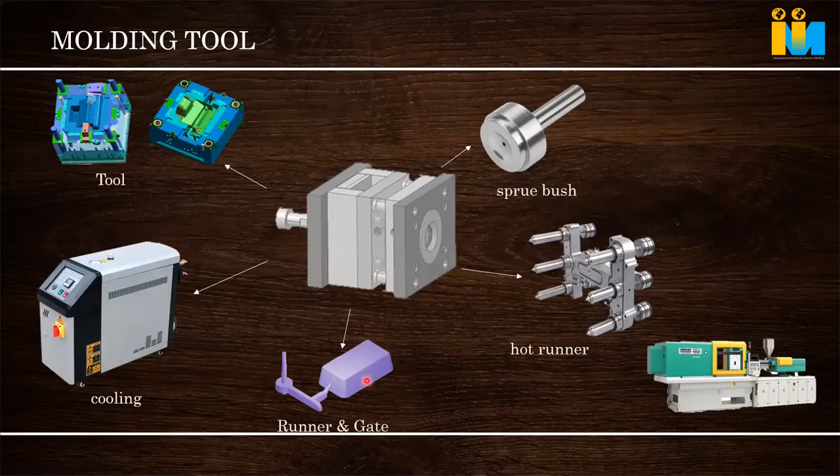These are the types of mold everybody might be knowing. These are standard molds, like two plate mold we used to call this. This is a standard mold, we used to call it two plate mold, and there are slider, side action molds also. Then these are lifter type molds where a lot of undercuts are there. And this is unscrewing mold, like caps, closures and all.

Where our thread comes, you do unscrewing, that gear system, everything will be there. For FMCG caps, closures, bottle caps and all, it is majorly done this way. And this mold type is like stripper plate.

When there is a bigger part, we cannot give a small ejector pin, because when we give an ejector pin, the part gets pierced off in that area, or a hole will happen. So uniform ejection is a technique known as stripper plate. Your part's maximum area will be covered by the ejector plate, and it will be pushed by the stripper plate.

And the last one is a three plate mold. Three plate mold means runner will be coming from one side and the part will be coming from another side. With these molds, three plate mold is not recommended for critical parts, because in a three plate mold the runner length will be so huge, there will be so much pressure drop.

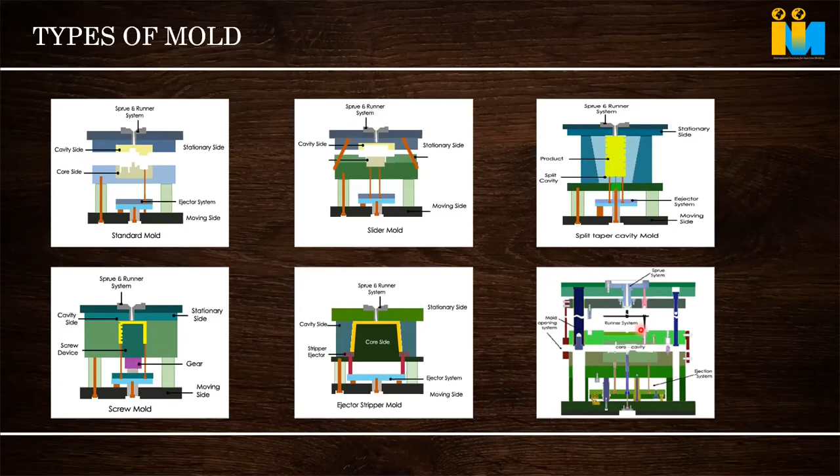And the gate also, we have to give a very conservative gate on the part. There could be problems. We will be compromising something. Whenever a critical part comes, instead of going for a three plate mold, better go for a hot runner mold.

Now is a very very important thing, runner and feed system. This will go a little deep. So runner, as everybody knows, is a channel machined in the mold which connects the sprue from the machine nozzle. Sprue will come, runner will come, then the gate will come.

Everybody asks what should be the size of the runner. Straight away they will increase the size of the runner. But runner has an optimum size. If the runner size is too big, what happens?

It is a wastage, because our part might have cooled in 10 seconds, but just to cool the runner and open the mold, we'll keep another 10 seconds extra. It's a money waste, our cycle time wastage. So an oversized runner will increase the cycle time and it's a wastage of money.

And if the runner is too thin, what happens? Huge pressure drop. Whatever pressure you are giving in the machine, nothing will go to the part. So your part will not have consistency or proper filling. Then what happens? We'll give all the pressure in the machine to fill, that means again our power is going to loss.

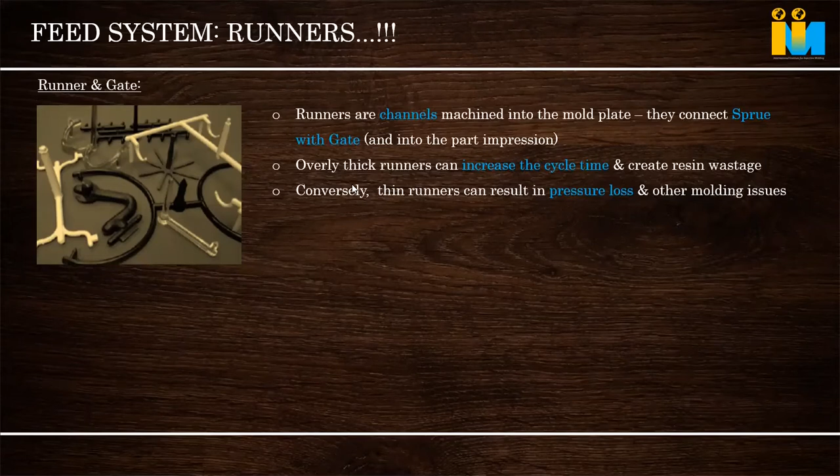So for runners, there should be an optimum size of the runner, based on the pressure drop, as I discussed. Based on the pressure drop, we can decide the runner size. Optimum runner design helps ease of filling.

And we have to see what is the weight of the runner also. If we are not able to grind and reuse the thin runner, then there's no meaning in increasing size. But at the same time, we have to see what pressure drop is happening also. Some people keep a small runner, saying weight of the runner should be less, but they never see what pressure drop is happening, as we discussed earlier. So we have to see pressure drop to arrive at the size of the runner also, to make it optimum.

Then runner, there are multiple types of runner cross sections: round, semi-round, trapezoidal are there. Which is the best, we'll be discussing.

And runner polishing, we have seen in automotive industry mainly, they never polish the runner. They will polish their part nicely, but leave the runner as it is. No, that is not the correct thing, because the material from the runner only goes to the part. So for proper flow to happen, we have to polish the runner feed system also.

So runner thickness depends on the part volume, weight of the part, flow length, everything. If the runner is too small, it will not help, because of pressure drop the material freezes away.

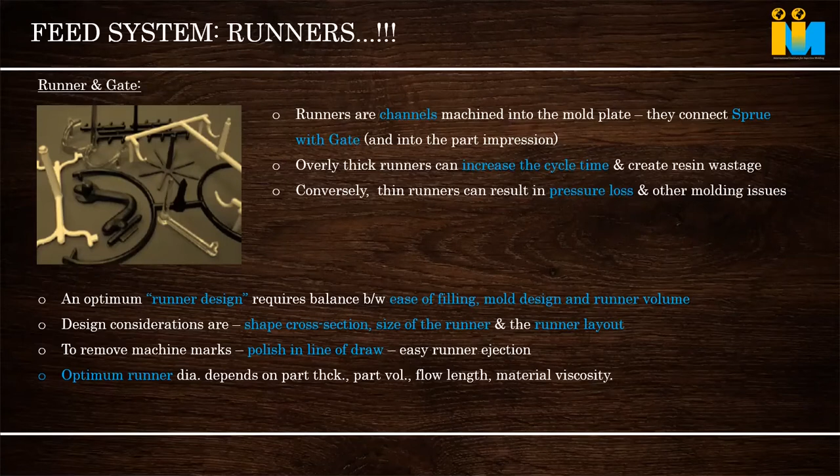So we may have to give a bigger size. These are the types of runners. First is known as trapezoidal runner. Second one is modified trapezoidal, where we put a circle and join with an angle. Third one is round. Round happens as a mistake due to machining. Next is half round runner. And there is an odd shape, trapezoidal but odd shape.

So among these, which runner is the best? You can see round is the best, and round trapezoidal is the better.

So what is the efficiency of a runner? How do we understand the efficiency? Efficiency of the runner is derived by the area of the runner divided by the circumference or periphery of the runner. If we calculate that, we get the proper efficiency. So area of the circle divided by pi r square by pi d gives the efficiency of the runner. If we calculate for every runner, we come to the conclusion that round runner with a small cross section gives the best efficiency. That's why round is the best runner, we used to say.

If you practically inscribe a circle inside the runner, flow in the runner always happens in the center portion. Whenever plastic comes and hits the side area of the runner, wherever steel is there, that area freezes. Only the center area flows, raw material flows through the center. So whatever shape you keep, only the center round portion will flow. It is best to keep the proper size based on inscribing a circle inside the runner, because only the center area will flow. Whatever else you keep, all those sides are wastage.

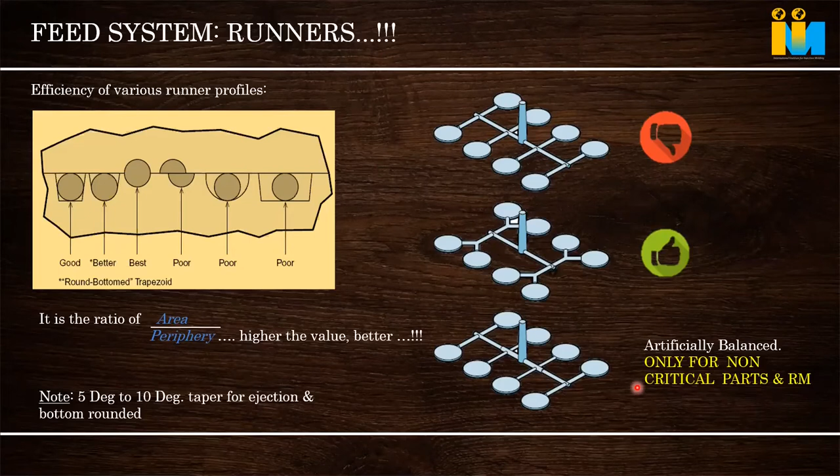What happens after the mold runs for a certain period? Some runners get smaller. If all the runners are the same dimension, it uniformly expands and no shape change happens. But if you are adjusting everywhere, some runner increases based on the pressure difference due to the size. What happens then is that cavity overfills or underfills. So we will not be able to control it properly.

So this is a nozzle, everybody knows this. In the machine, this is the sprue bush. The entry of the sprue bush for engineering plastics should not be too small. We see machine suppliers give like 2 mm, 2.5 mm, minute sizes. It is our duty to increase it to 3, 3.5, or 4 mm based on the raw material. For tougher material you have to go higher, because if you inject tougher material through a small hole, it gets damaged — the molecules get damaged.

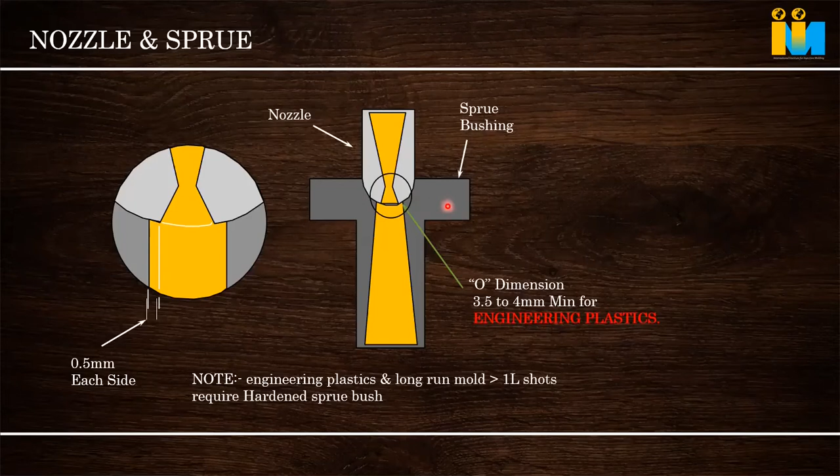So we should take care of that. Machine people give a standard nozzle, but it is based on our raw material that we have to adjust it. The sprue bush diameter and nozzle — normally, the sprue bush should be 0.5 mm higher than the nozzle, so that no mismatch happens. This is the normal thing. And this is a sprue puller.

So the function of the sprue puller is to pull the sprue from the cavity side and bring it to the moving side, and while ejection it is pushed out. So this sprue puller is not just to pull the sprue. There is one more very important function. So based on that, we have to design it.

Sprue puller is the first point where the cold material from the machine tip will be. That cold material first comes and stays somewhere. It should not go to the part, inside the runner and the part. So this sprue puller is a cold slug well also. It will trap the cold material. That's why it is known as a cold slug well.

I know some mark will be there in the part. Sometimes the gate will freeze off. In the running, in between, if the cold slug or sprue puller is not proper, some cavity will freeze, some cavity will not come suddenly, and that cold material will go. For that, a better sprue puller design is needed.

And second, Z puller, people are using. This is not recommended for automatic type of mold, automatic running mold, because you have to remove it with the hand every time. It will not fall down. If it doesn't fall down and you are running it automatic, then damage can happen to the mold.

And third, like some people, instead of making a reverse taper, they put a groove. What happens is when the sprue or runner ejects, that groove will sit inside the mold itself. Next time it will not pull. So that is not easy to manufacture, and not so effective.

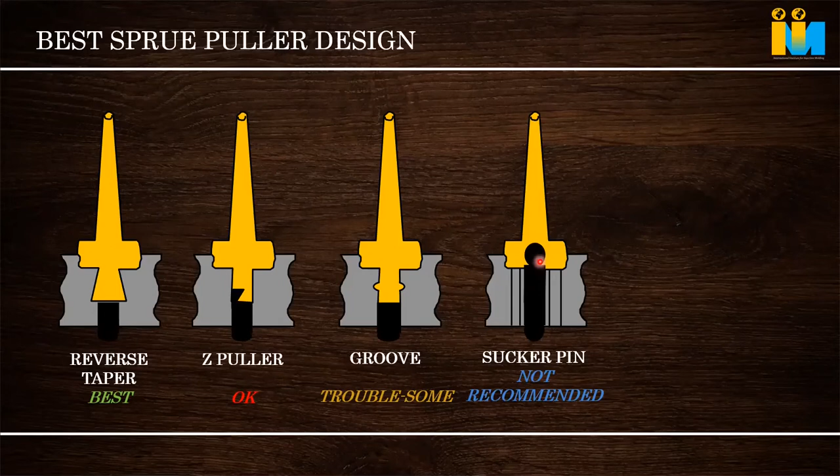And this is a type of sprue puller used in 3-plate mold and all. This is not recommended because this obstructs the flow of raw material. The raw material flow is obstructed by this puller, so pressure drop happens, filling problem happens. So this is not a recommended one.

Then what should be the size of the cold slug well? I told you, it's not cold slug - wherever there is a dead spot happening, metal is changing its direction, there should be a cold slug well. It is not a cold slug, it helps to trap the cold metal, the front metal that is coming.

So normally it is 1 to 1.5 times the diameter of the runner. That is the dimension. Wherever the end is there, you give a 1 to 1.5, that's why the runner is little bit extended. If not given, then you'll have a quality issue in the molded part.

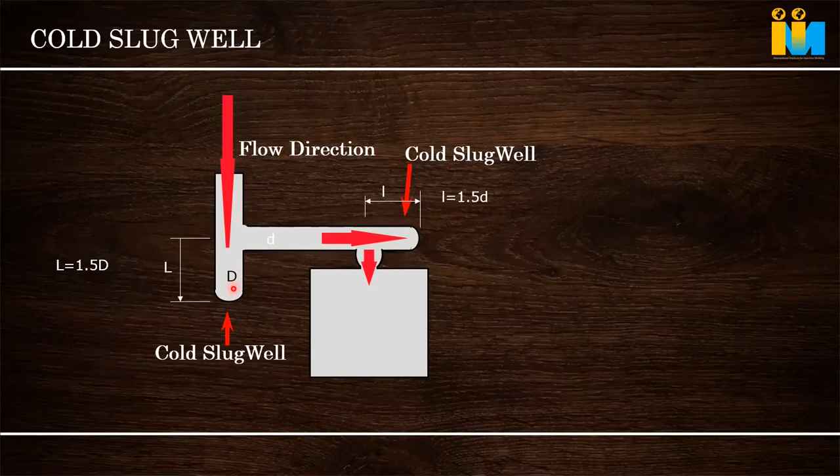These are the major types of gates everybody might have seen. First is the direct gate, second edge gate, fan gate, tab gate, overlap gate which is given above the part, some diaphragm or disc gate for round parts with uniform filling. And second is submersible gate, like pinpoint gate or submersible gate, banana gate, all these things. These are the second type of gate, known as automatic degating. Here the part will come separate or the runner will be separate. In the first type, we have to do a secondary operation.

So ideally, broadly we can classify this into two types: one is the edge gate, second is the submersible gate. All other varieties are a form of edge gate only. Whatever we are seeing on the left side, all are some form of edge gate because everything is attached to the part - direct, edge, fan, all these, based on the filling. Gate mark is coming, so we'll give a little bit expanded fan gate. So all are forms of edge gate, multiple types of edge gate. Only the shape changes based on our application or some molding issue.

Edge gate size is based on the runner - see how to derive the size of the gate, we'll be speaking later on. So people say it is based on experience. No, it is not just based on experience. There is a calculation for deriving the gate size.

Then there is a submarine gate or submersible gate. Many people don't prefer to use it. Why? Because they feel the gate mark comes. But how to make a submarine gate? Submarine gates are very fantastic gates. They can give us the same feel as much as an edge gate if we are designing it very properly.

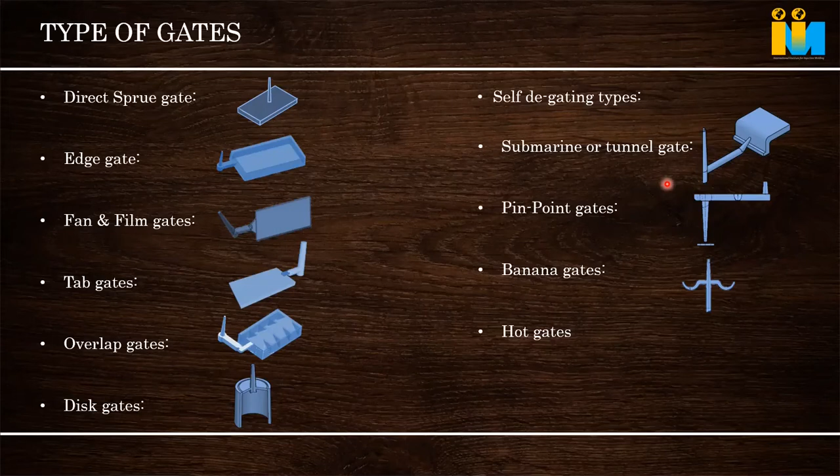If we are not designing properly, it goes for a toss. You'll get a lot of issues - pressure drop, gate freezing, everything. Then people will change it to edge gate. How can we design a submarine gate? We'll go to the next slide.

There are two types of submersible gate. One is a standard construction in which directly this will be machined in a conical shape - this is a normal submersible gate. And second is a high volume or modified tunnel gate, which we used to call modified. So I recommend this second type of gate.

Why? I will describe. Whenever material comes from the sprue bush, runner, into the gate and to the part - till the gate and in the part also - that melt temperature, from 300 degrees at the machine where we are injecting the material, it drops. It comes to 300, 280, 290, 280, 270, 250, 240 - it starts dropping in the flow as it flows through the sprue, runner, and gate.

Our requirement is that when it flows to the part, minimum temperature drop should happen. For getting a better quality part, 300 degrees should remain 300, or very little temperature drop should occur, like 290. Normally a 5 to 10-degree drop only is recommended to get a consistent part.

Because when the temperature drop happens, the total flow behavior of the plastic changes, since plastic changes behavior based on temperature. Higher the temperature, flow is higher. If you go still higher, then burning happens, and then it becomes solid again. Burned material is like carbon - it never flows. Our motto is to keep the temperature from dropping beyond a certain limit.

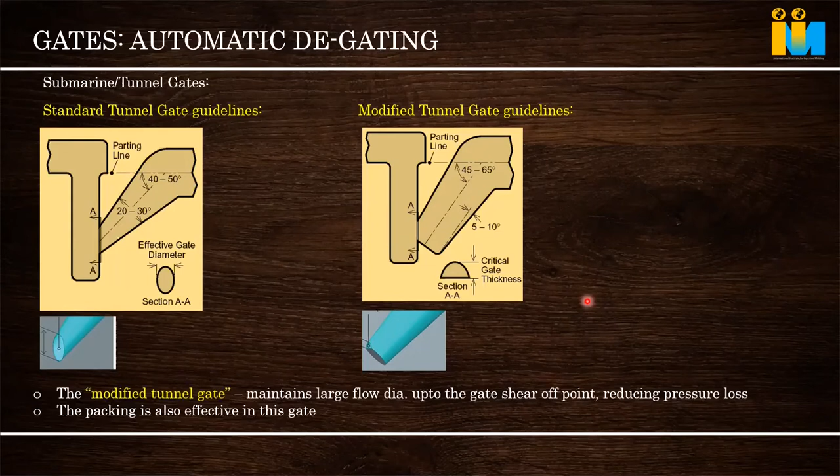What should be the dimension? I am just showing one example - this is one example I normally used to make for parts. It's not just the shape we give, that modified shape. Many people, whenever we tell them to keep that shape, just copy the shape only - no, there should be some volume.

It's 2 to 3 mm here. Then only it will heat and create turbulence. And I also mentioned plastic always flows in the center area of the flow path. Here the volume is higher than the center core area, so a lot of raw material will flow inside the part. This is how this gate is designed.

So here injection time also gets reduced because melt temperature will not drop - you don't have to push again, because whatever temperature drop happens, it regains when it touches the gate area. That's why this gate is recommended. The part fills easily and packs easily. I replaced an edge gate with this gate on a Snyder machine and got savings, since we were working for savings there.

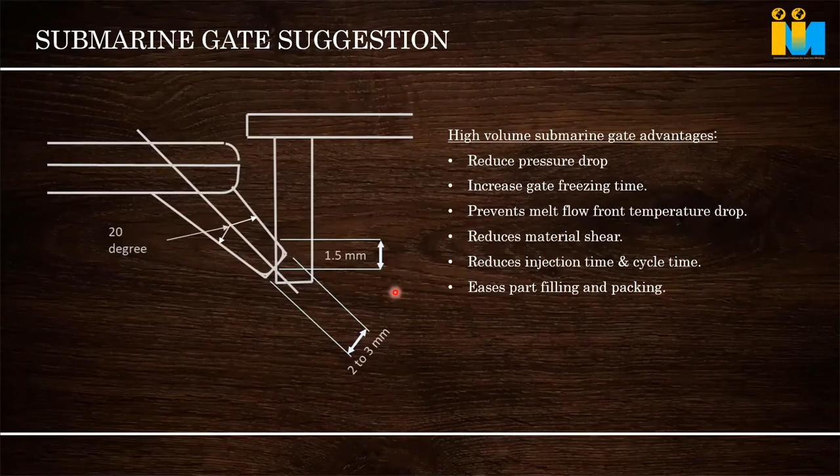How to derive the size of the gate? Gate size is not something you just go with everywhere - everybody says it's based on experience, but no, it's not just experience. There are a few considerations we have discussed regarding pressure drop. Whenever we are making a mold, we have to see what pressure drop occurs. Up to the gate, it is recommended that cold runner pressure drop can be up to 30 to 35 MPa. In a hot runner, it can go up to 50-60 MPa also.

If it is not within range, it means we have to modify the gate size. The gate size is not proper. This is under-designed.

Whenever we are designing a mold, at design time, how do we set the gate size? It has to be done based on the shear rate of the raw material. What is shear rate?

Every raw material has its own shear rate based on its molecular property. The more complicated the raw material, the less shear rate it can take. Shear rate means you are pushing a raw material at high speed inside the mold, and due to the higher temperature, it gets destroyed. If it is destroyed, your part will not get the desired property.

For shear rate, there is a calculator for calculating it based on the gate size and injection time. There is a calculator I will share with you.

If it is polypropylene, a simple commodity plastic, it can take shear rate up to 1 lakh. When we come to ABS, it can take up to 60,000. When we come to polycarbonate, it can take up to 40 to 50,000. When we come to Ultem or something, it can take 30,000.

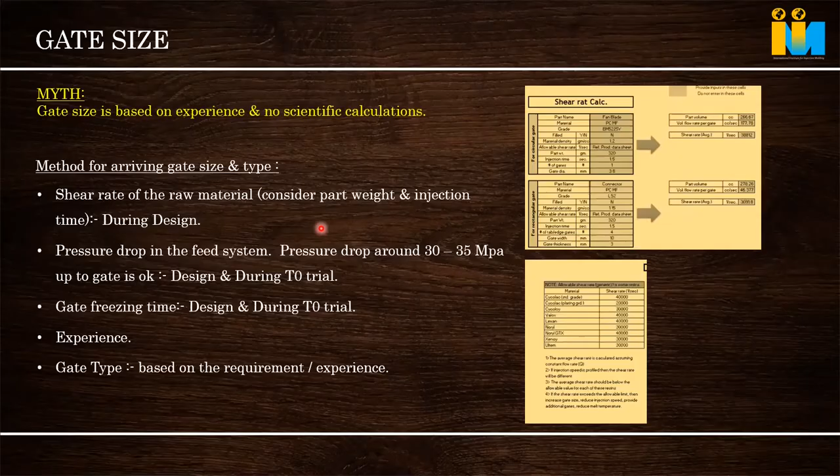So all these things we have to take care of when designing. This is a shear rate calculator.

Hope everyone can see. First I am putting the part name and so on, whatever you want to put. There is also melt density, which will be there in the data sheet. You can put the density. For polycarbonate, it is 1.2, so I put that.

Now I have to put the theoretical weight of the part, which I already know, so we put the weight. And injection time, as I told you, a good injection time will always be lesser. You can put 1 second of injection time, don't put 10 seconds, because that will give a wrong result — 10-second plastic behaves so oddly, because it will become totally cool while you are just pushing and filling, so it will not give the right result. Keep in mind, even the biggest part, like an automotive bumper part, fills below 4 seconds.

If it is not filling, then we have to go for multiple gates. It's not like increasing the injection time will fill the part properly. If it's not filling, instead of one gate, we give multiple gates sometimes in a bigger part, because every gate can only take up to a certain size. You cannot increase the gate size too much to avoid shear. So instead of giving one bigger gate, we split it into 4 gates, and we maintain the shear rate in all gates at the required level.

So my injection time, I kept it at 1 second. Number of gates in the part, I'm keeping 1. This is for a round gate. Gate diameter, I am keeping 1 mm. Material is PC. Now you can see the result is 2,71,000. You see? 2,71,000 is the shear rate coming out. Now we have to go to the chart. This is PC, okay?

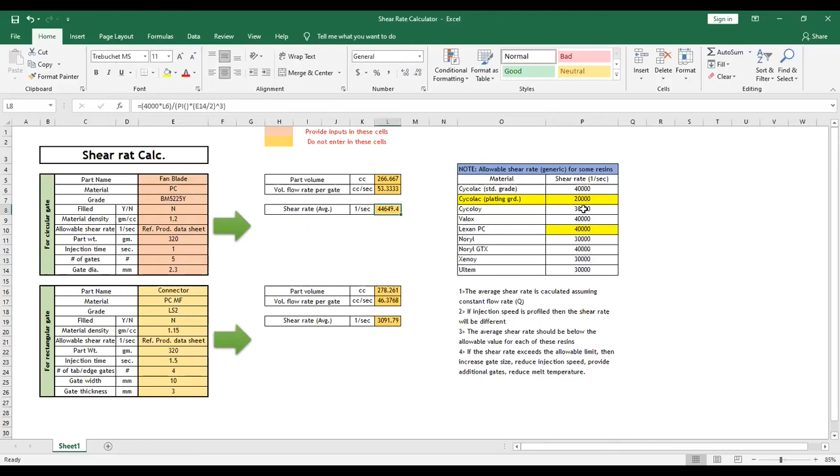Then we have to increase it. If we are not able to increase the gate size, then we have to increase the number of gates in that case to fit it inside this. Here you have to increase the number of gates. This is some of the pattern.

If gate is on a bigger part, suppose we are giving the gate at the center, it's like a scale. Suppose this is a scale. No scale you can see, even the biggest of scales, you cannot see a gate in the center of the part. If you give it at the center, what happens? Flow will happen in both directions. What happens? You will know the part will tend to bend.

If instead we are giving two gates, then what happens? Material will come and hit, and a weld line will happen at the center. So for bigger parts we always give gates on the side. In automotive parts, what we do instead of giving it on the side is multiple point injection, and sequential injection. One gate from the edge will start injecting. When the flow reaches the next gate, automatically the valve opens and injection happens there. So that meeting will not happen, it flows uniformly.

So this is how the gate even gives the shape of the part. And it is not like that for every part - it's an indication I am telling you. Suppose your part with just one gate is bending, or with a center gate it is bending, that means you have to shift the gate.

There are two types of gate. One is an edge gate, one is a submarine gate, or like a pinpoint gate. For which shape is the runner best? When we see, an edge gate will always come at the parting line. So for an edge gate, a round runner is the best. So this is a round runner.

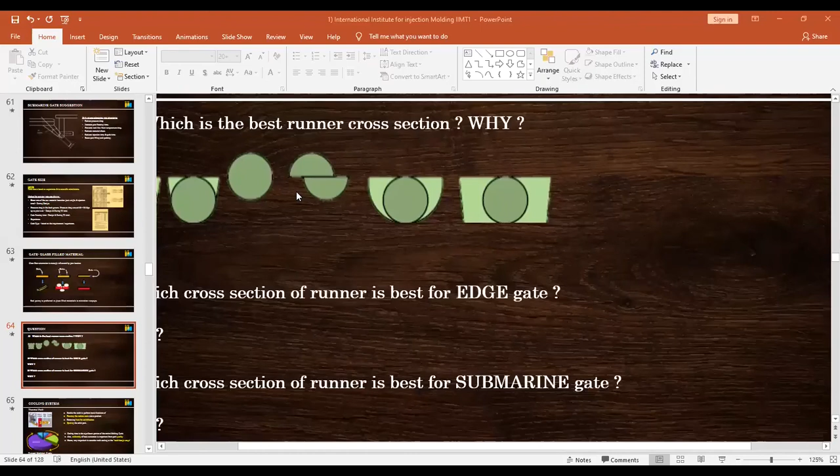This is the parting line of a mold. The edge gate will come here. When we manufacture the edge gate, it is like this. Okay.

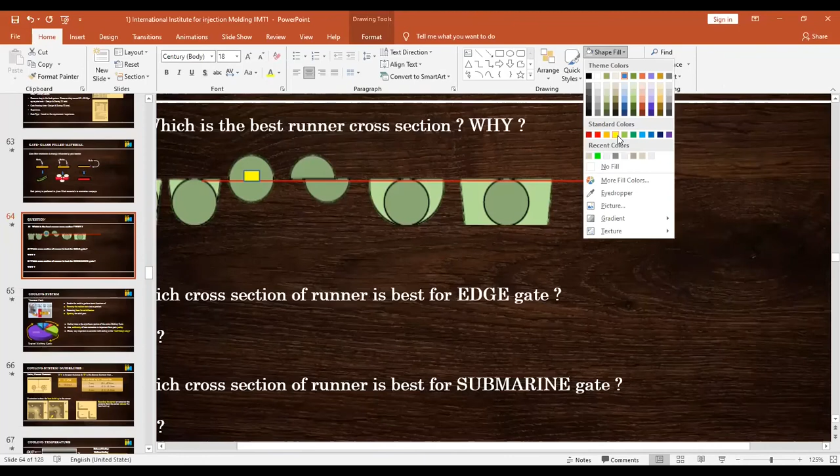So it comes in the center. Plastic material always flows through the center of any profile. So whatever profile it is, if it's a round runner, the center material goes into the edge gate. So it will give a good result.

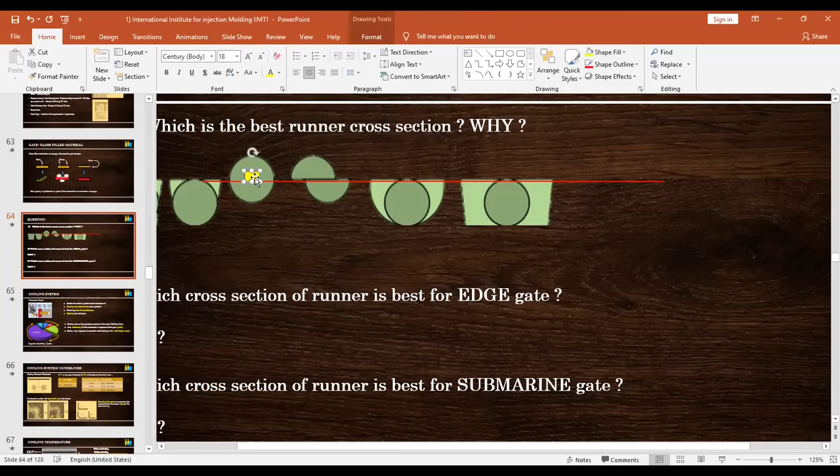Suppose the same edge gate is given in a trapezoidal runner. Then what happens? One side has hot melt, and melt flows in the center of the runner, but one side is steel, so that side cools off. Then the efficiency of the gate will reduce. So for an edge gate, always recommend a round runner.

But for a submarine gate, I'll show you, it looks like this. Submarine gates come in one side, it cannot be on the center, we cannot keep it in the center. So for a submarine gate, this trapezoidal runner and round runner both give the same result.

This is why for an edge gate, it is recommended always to have a round runner, even a small one is good enough. But giving a trapezoidal runner in an edge gate will reduce its gate efficiency. A submarine gate, however, gives the same result with both runners.

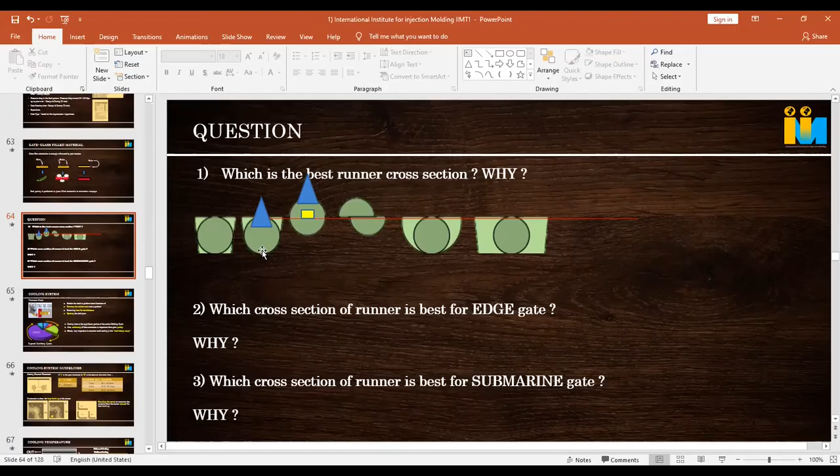Bharati is asking how to select a gate point. I told you, based on the part profile, gate has to be selected - that's one thing. Second, based on thickness, gate has to be located at the thickest part or thickest area. Third, flow should be uniform - better to have one direction flow instead of mixed or turbulent flow.

From the gate, the part may have multiple end of fills. Everywhere the end of fill should be the same. So the distance from the gate to the multiple end of flow points should remain almost the same, to have a better temperature drop and reduce the temperature drop. Pressure inside the cavity should also be similar. So the gate has to be positioned in that manner.

Okay Bharti, hope I answered. On gate tooling design, I'll discuss with Bharti separately because it's a deep subject, and we can do mold flow analysis also. The thing is, without reducing the temperature - with lesser temperature loss - we have to fill the part, and without reducing the pressure, we have to fill the part. That is the requirement.

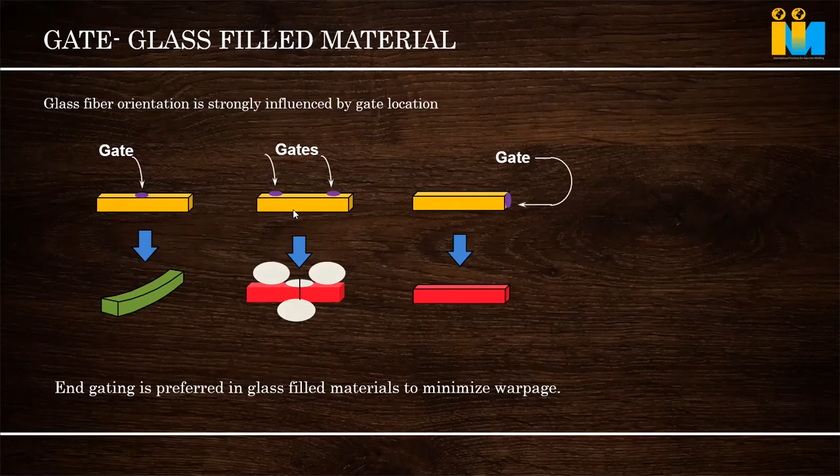For that, we have to position it properly. So cooling means it's not just dropping the temperature. It is dropping the temperature from the melt temperature to the temperature specified by the raw material manufacturer for that grade, and it has to be uniform in the mold.

It's not like if I touch one portion of the mold it's 60 degrees, another 100 degrees, and another 120 degrees - that is not the right cooling. Part has to be ejected below the heat distortion temperature, as I discussed. So the cooling has to happen until the part comes below the heat distortion temperature quickly, not very slowly - very slowly means you will lose cycle time.

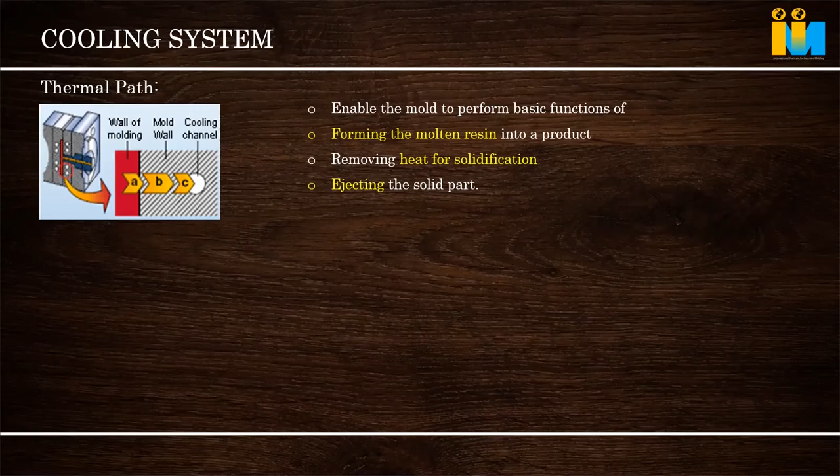Why is cooling time so important? Because cooling time takes away 60% of the cycle time. So if we have to reduce the cost, we have to attack the cooling time, not just modify the machine. If it is 10 seconds or 20 seconds, just reducing 16 seconds to 15 seconds is not enough.

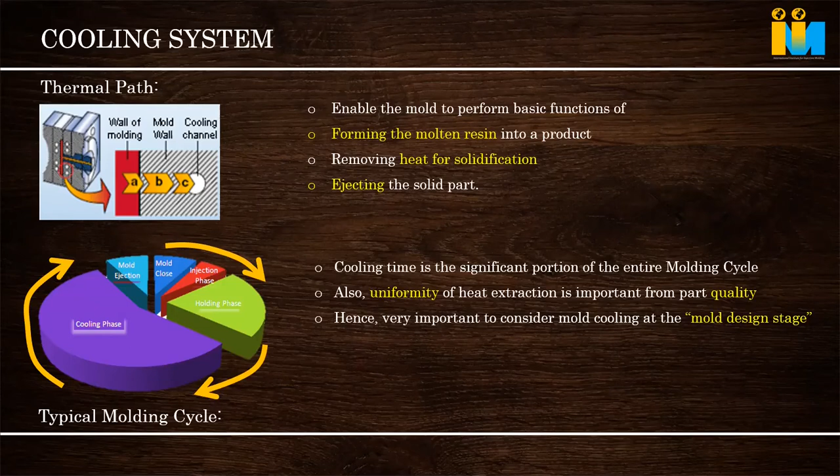Give sufficient cooling line and reduce - it's not just about changing the machine, we have to support that. If it changes, our mold should come to this temperature quickly. So that's why cooling time has to be attended to properly, and uniform cooling has to be done.

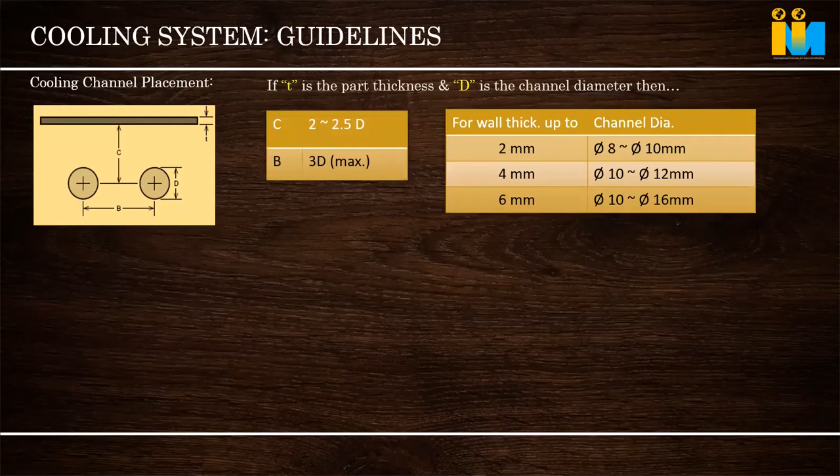What is the distance? Normally this is a thumb rule from the cavity, based on the thickness of the part. You can see the approximate figures - it has 2 times the diameter to 2.5 times the diameter. We should keep the cooling line distance from the part at 2.5 times the diameter of the cooling line. That is a thumb rule.

For wall thickness, for a part wall thickness of 2mm, the thumb rule is to use a cooling line of 8 to 10mm. If it's a thicker part, we have to increase the cooling line diameter and length also. It's not that everywhere we will put 8mm just because I have only an 8mm drill - so for 6mm and also for 10mm thick parts, I will adjust.

No, based on the thickness of the part - increase means more material will go to the cavity, so more temperature it takes, and more temperature we have to pull from the mold within a short time. Mold is a heat exchanger, so for that we have to increase the cooling diameter. Sharp corners are very difficult to cool.

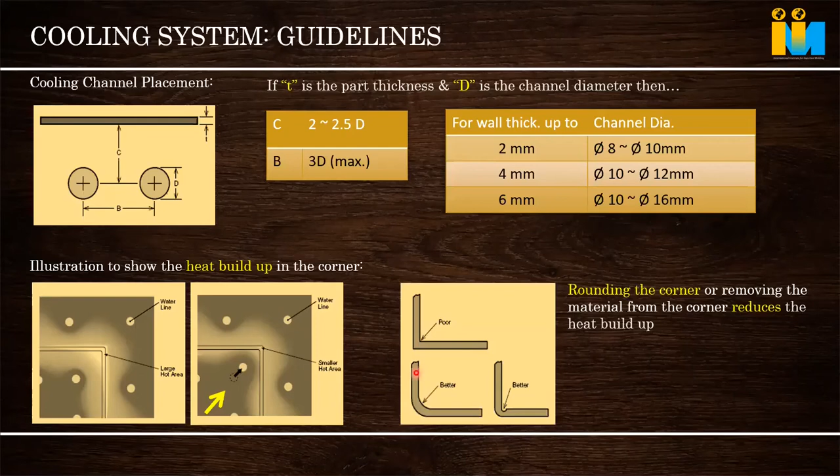So what we'll do, after the part bends coming out, we'll position the cooling line near that hot area, so that it uniformly cools near it. This is how cooling line is designed. If there are sharp corners, there's a problem distributing temperature, so it is better in product design to round off the corners. This is very very important.

Every molding shop has this problem. For ease of connection, or out of laziness, what they will do is have 10 lines in the mold, but one inlet everywhere, looping with a hose pipe, one outlet there. This is not the procedure.

Ideally, for a critical mold, it is said that if you measure inlet mold water temperature and outlet temperature, there are equipments to measure that, it should be within 1 degree difference. For a normal mold, at least within 5 degrees.

It is not like cold water at 40 degrees goes in, and when it comes out it has become boiled, like it's been heated up. That is inefficient cooling. Cooling temperature, the liquid inlet and outlet, there should be minimal difference. That is proper cooling. So this looping will not help that.

If you have a lot of lines, what we can do is keep a manifold for that. At the inlet there should be a manifold, and from that manifold connect one line to the mold, and the outlet also goes to one manifold. Instead of this looping - everywhere you can see a lot of loops - that loop should not be there. They will say lines are less, and all these excuses.

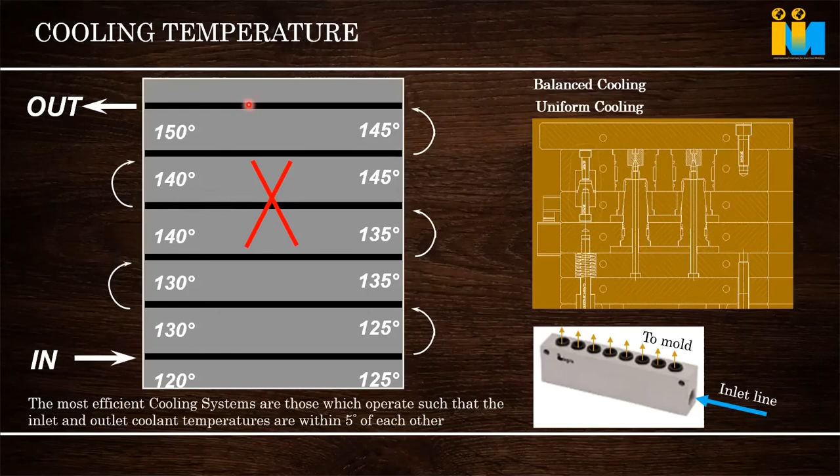So this is a mold insulation sheet. As we know, the mold is a heat exchanger - hot metal comes inside and the mold cools it down. It is better to insulate it from the machine.

Normally, keeping insulation on the cavity side is very good, and both sides is best. But at least insulate the cavity side, so that whatever machine platen temperature exists will not come to the mold, and the mold temperature will not go there. This is very very important for a critical part.

Our mold is an independent item, because if the mold directly contacts the machine, what happens is the machine platen itself is too big, and it will influence the temperature of the mold by conduction. So it's better to use a mold insulation sheet to get a considerable critical item. This is very very important, both sides, but at least the cavity side is very important.

If a hot runner is mandatory, we cannot leave it out - everybody knows that.

Now this is air venting. Whenever plastic melt flows into the hollow cavity, there will be air inside the cavity - initially there is air only. We are injecting the raw material with high pressure, so the air gets displaced, and if it doesn't escape out of the cavity, it gets trapped in the raw material. When it gets trapped, it gets superheated - trapped means it cannot escape, and the raw material comes and pushes and compresses it. So whatever gets compressed, heat generation automatically happens.

It happens like that in a diesel engine. Air is compressed 1 by 8, 1 by 16, then the temperature increases to superheat, around 1000 degrees, and there diesel is injected. Similarly, here the air compresses and its temperature goes up to 300-400 degrees, and it burns the material itself, causing a black color, a burning mark.

So we have to displace the air inside the cavity whenever the material is coming in. For that, air venting is given. So air vent depth and thickness are very very important.

Thickness depends on the raw material used. Viscous, thick raw material requires deeper air vents. If the raw material is very fluid, like nylon or PP, it flows like water. If you give a bigger depth, the material also will flow along, and once material flows inside, it will block the air vent. So based on raw material, every raw material has its own air vent consideration.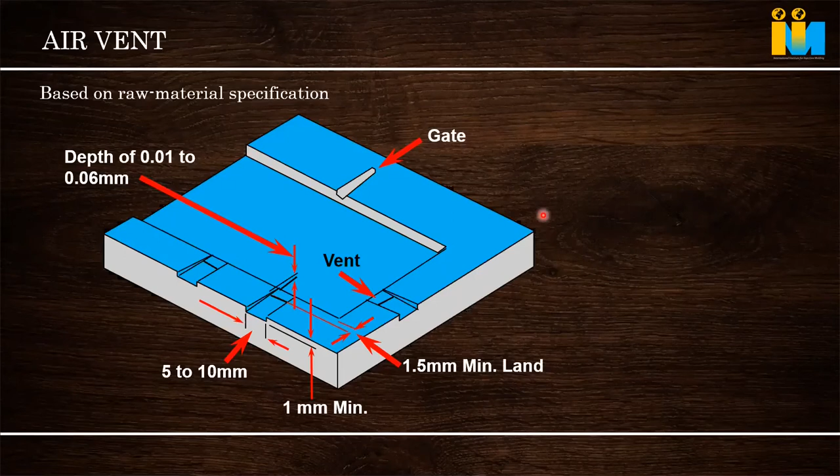Hot runner is used because in our normal mode there will be runner wastage. Whenever we give a hot runner, that runner wastage will be eliminated. Moreover, material will remain in a hot condition until near the part, so pressure drop reduction and melt temperature reduction, everything will be taken care of. Basically, hot runner keeps the melt at a higher temperature till the gate point. This is the function of a hot runner.

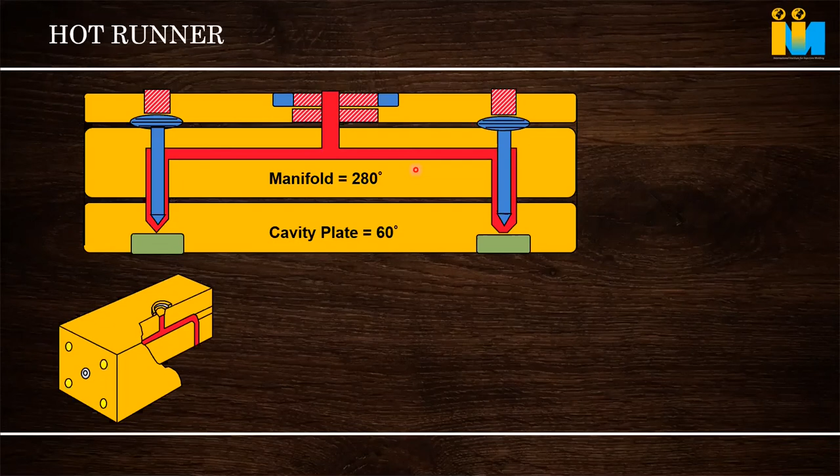Hot runner steel selection is based on the raw material and what filler is used. This also has the same problem - abrasive wear out is there, chemical wear out is there. So whenever you are using a hot runner with a chemically abrasive, erosion-prone material, based on that, hot runner people will select stainless steel, Stavax, or something like that. Sometimes P20, if wear out is not an issue. If we have glass fill content, like 30% glass fill, they use hardened steel to prevent wear out. So this is what hot runner is.

General mold tips - these are tips. Gate size has to be kept not just by our experience; it has to be bigger, keeping in mind the shear rate of the raw material. I have given 30,000 to 40,000 depending on engineering plastic, most engineering plastics 30 to 40,000. And keep in mind pinpoint gates are not like in a three plate mold with small pinpoint gates. No, three plate molds are not advisable for critical parts because they result in higher shear rate and affect part quality.

If we are using a three plate mold, proper design is needed - you should consult a proper consultant. Otherwise you will not get repeatability.

In case of cold runner mold, the inlet sprue bush inlet diameter, as I discussed, should be 4 to 4.5, not small like a pin. Many people keep small sprue bush for engineering plastic - I'm telling you, the nozzle diameter has to be 0.5 lesser than that. In case of hot runner, the sprue inlet, hot runner inlet, and machine inlet have to be the same - it should not be so much difference, and it has to be bigger, not small like a cold runner.

And in molding, as I told you about decoupled molding, whatever injection is, up to 95 to 98%, all this has to be done. Maximum cooling circuit should be used and looping should be avoided. If you have many circuits and it's difficult to connect, put a manifold instead of looping.

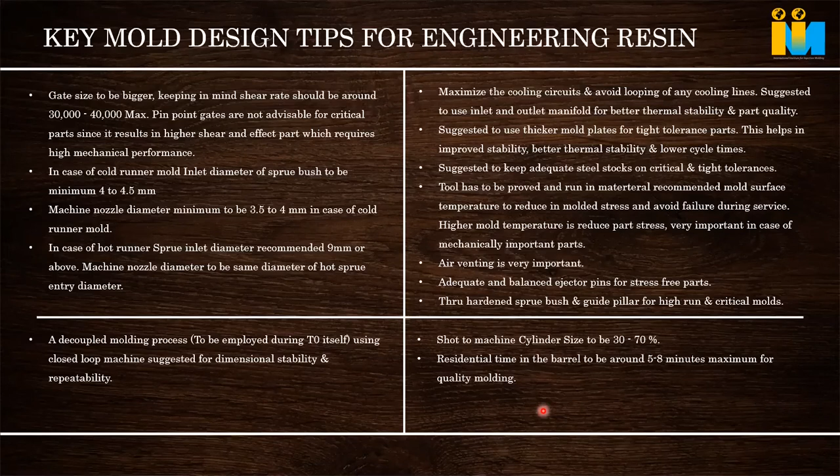It will maybe be a little bit faster. Yeah.

Sir, I would suggest - basically we have seen generally, this is my experience, that molding nylon is very critical. Specifically, the temperature window is very less for processing, and a lot of parameter issues come down in nylon. So if you can shed some light on that, possibly all participants might be interested, because nylon is a very highly used engineering polymer, and everybody must be suffering some issues with it. So, okay sir, this is a combined effect - our intention is to get a better molding window, a better space to operate.

If you are operating a very narrow operating window, keeping very narrow settings, then small changes will affect the process. This comes in machine selection, machine shot size capacity.